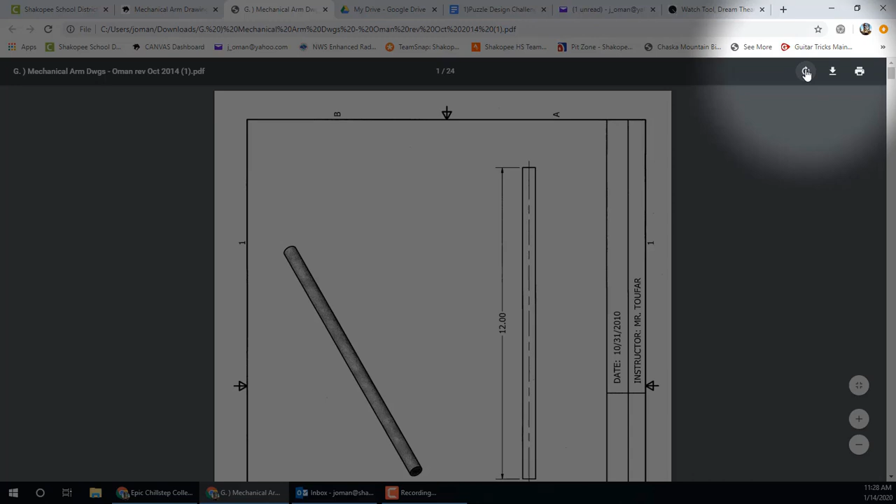This is Mr. Oman. We're going to be drawing the mechanical arm today using Inventor software. I need you to download and open the direction PDF file, rotate it until it's upright, and begin. There are 19 parts that we're going to draw.

The first 5 of them are all these wooden dowels, look like sticks. Okay, and you'll be drawing them as part files in Inventor, as I'm showing here. And you'll get pretty used to the routine here. We'll start a sketch, we'll draw a circle, finish the sketch, and extrude it.

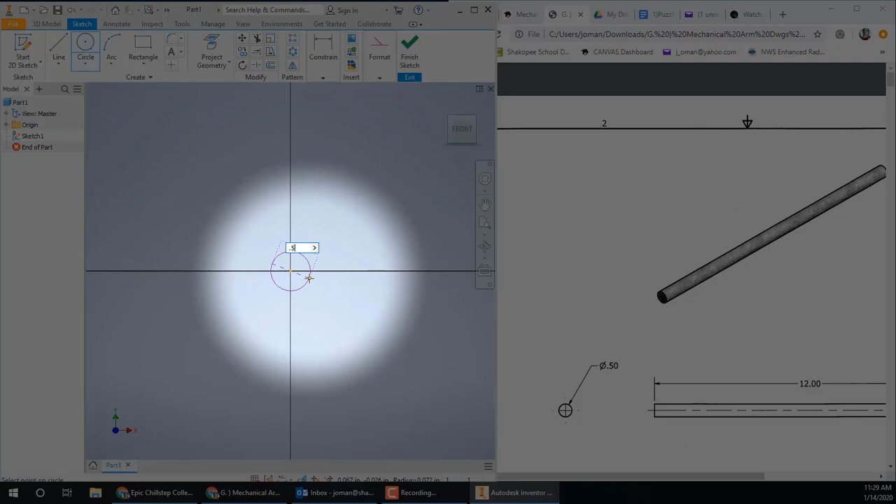So the first one, I'm going to use the vertical XY plane for my sketch. Draw a circle on it, 0.5 diameter. Finish the sketch and extrude it 12 inches. Okay, I am going to do this pretty fast, so feel free to pause the video here at any time. I'm going to keep things moving along here pretty quick as I go through this video.

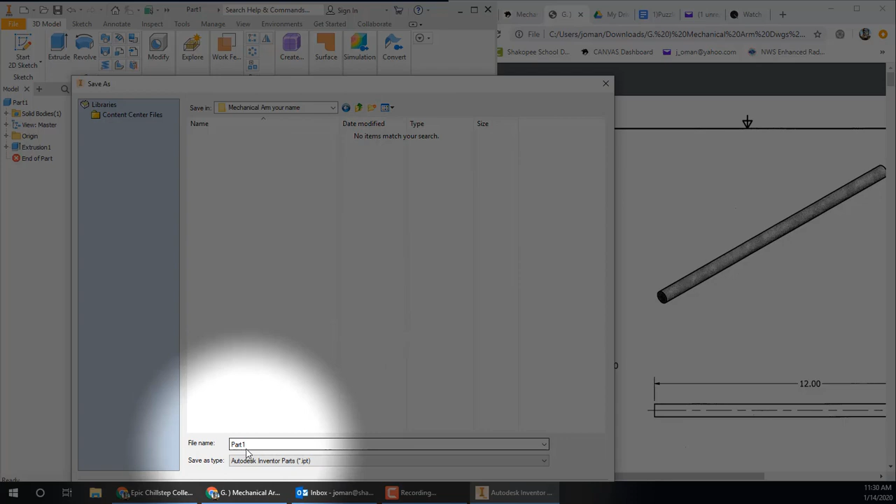Alright, so make sure you do a file save as, create a folder for yourself, most likely in Student Share or Student Home. I right-clicked, picked new folder, and I'm now typing a folder name, and I'm inside that folder. This is problem number 1 or part 1, so I'll just hit save, and it's going to be called part 1. Okay, start a new part and scroll down to part number 2.

Again, I'm going to go pretty quick here. These are very similar, same steps over and over. Start a new sketch. Draw a circle of 0.5, finish sketch, extrude, type your length in. Okay, so the first 5 here will look like this. Okay, if the name part 2 is listed, you should be able to just hit save, and it saves it in that folder.

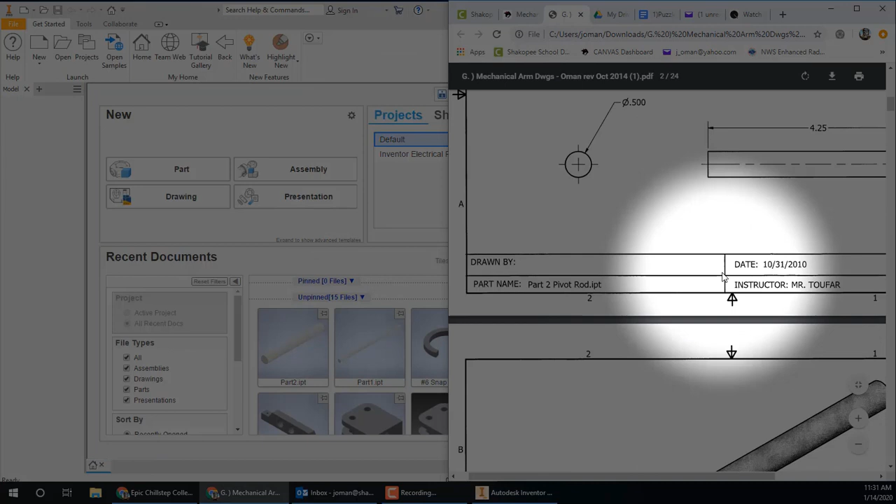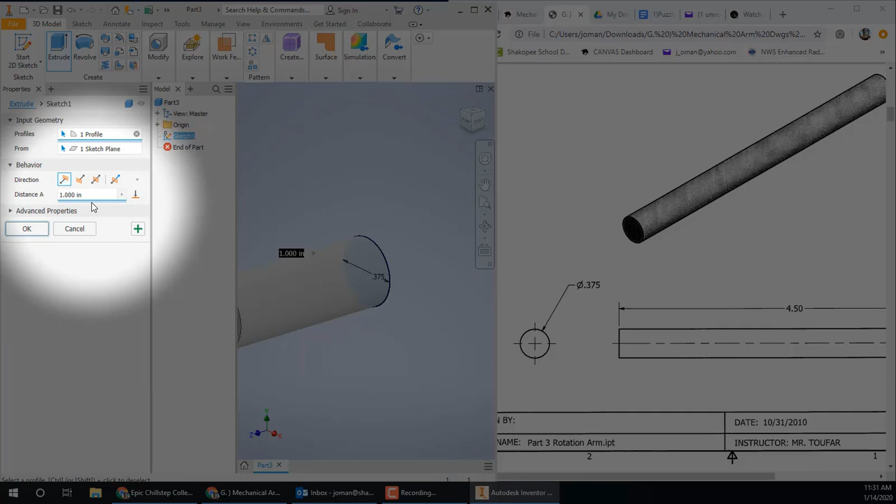This is part 3. 0.375 this time, and a 4.5-inch extrusion to finish it. Okay, on to part number 4, 0.375 diameter again. Looks like a 3-inch extrusion.

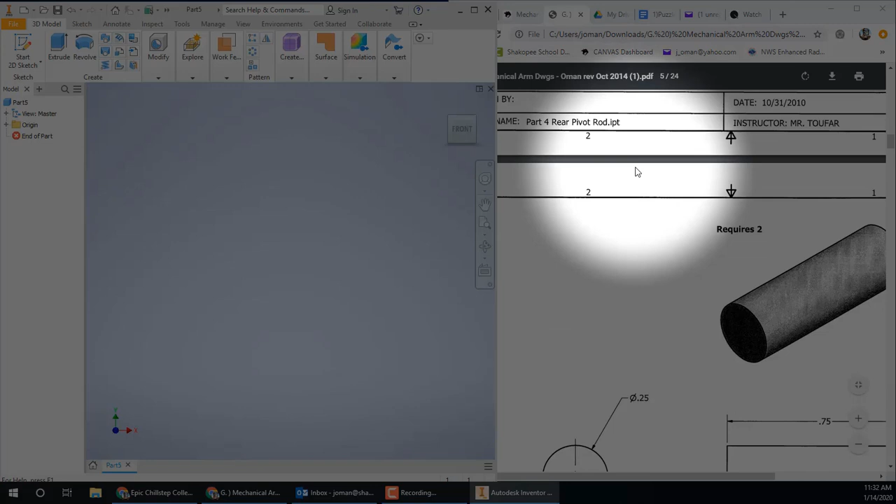Okay, it says requires 2 here on part number 5. We're only going to draw 1. Later on, when we get to putting all these parts together, you'll need 2 copies of this. But that's at the end of the project, so only draw 1 right now. So 0.25 diameter, 0.75 extrusion. Don't worry about the requires 2. Okay, so we've already got 5 parts created.

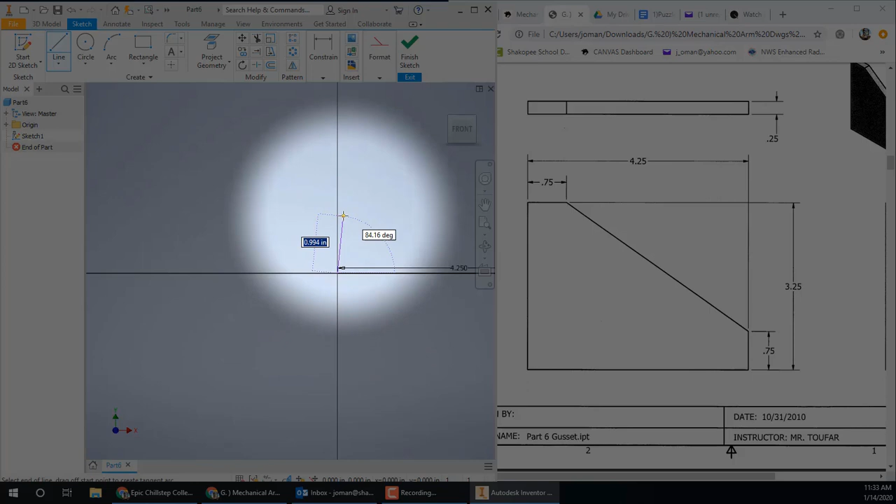On to number 6. Here's the first one where we're not drawing a cylinder. Okay, you start a sketch on the XY vertical plane. We'll just draw our way around the outsides. The angled edge there, we don't know what that angle is, so we'll just connect the endpoints of the lines around it. I'm drawing the bottom edge 4.25, now the left edge, which is 3.25 up.

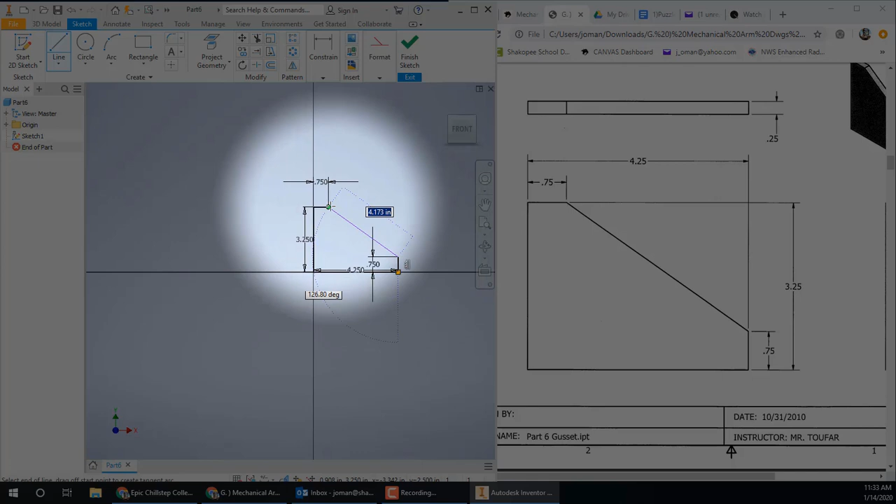Okay, I can't draw the angle just yet. I have to get in, finish all the other lines around it. Now I can connect the dots. Okay, and I'm going to extrude it 0.25, and save. Okay, on to part number 7.

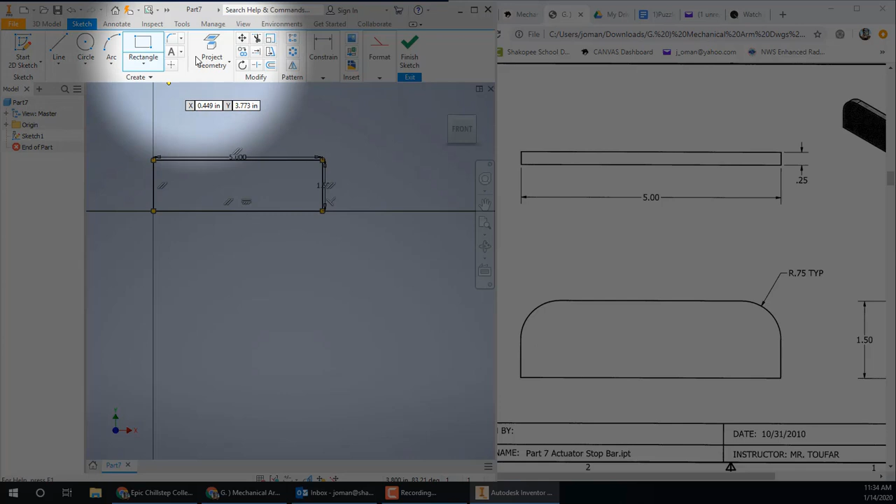I'm going to start by drawing a rectangle. And notice there's 2 measurements. The first one is the length of 5, then I press the tab button on the keyboard and I type 1.5 for the other one and enter. Okay, to round over the corners with a radius of 0.75, I pick the Fillet button and I have to type in that 0.75 setting.

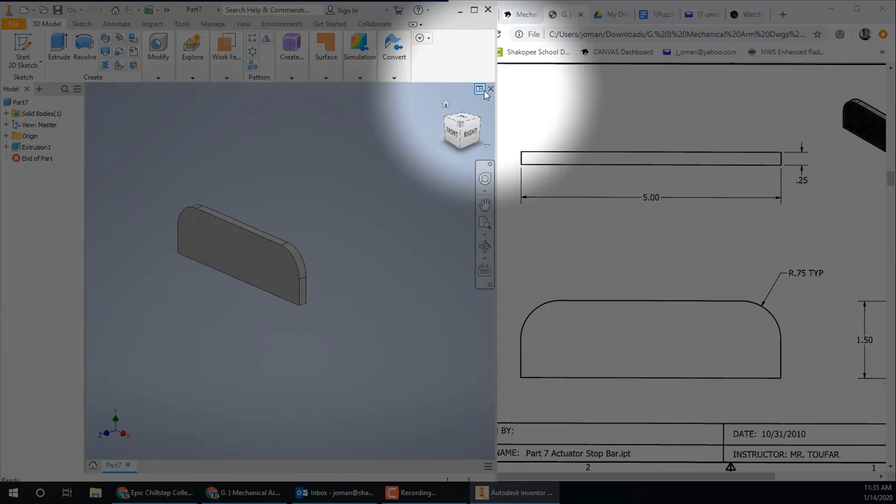Looks like I hit the enter key too early. I got to do it again. 0.75, click your corner, and the enter key to finish it off. Finish sketch, extrude 0.25. Okay, save it. File save as. Part 7. Now you can close it and move on down to part number 8.

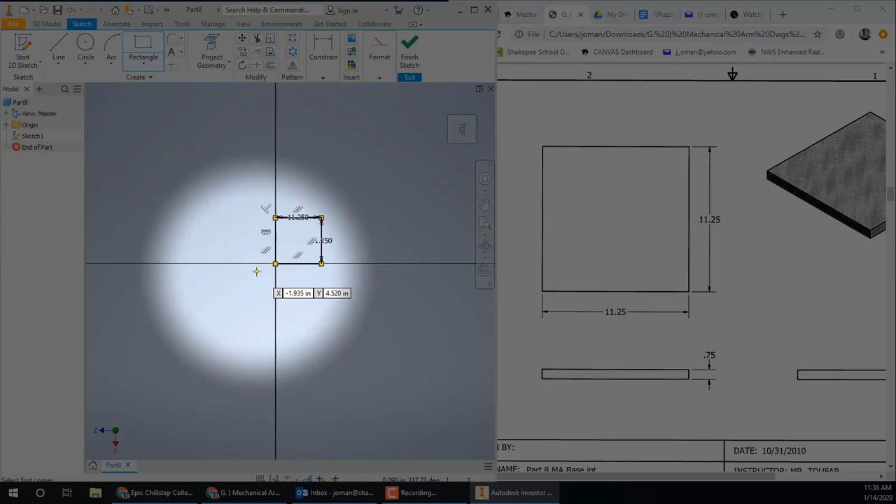I'll do the horizontal plane this time because this is the base or the platform that your mechanical arm sits on. So that's the way it'll be oriented in space when you get done. If you picked a different plane, it could still work. But this would be the best choice. So I drew a rectangle 11.25 by 11.25, extruded it 0.75, and I saved it. Okay, we're on to part number 9.

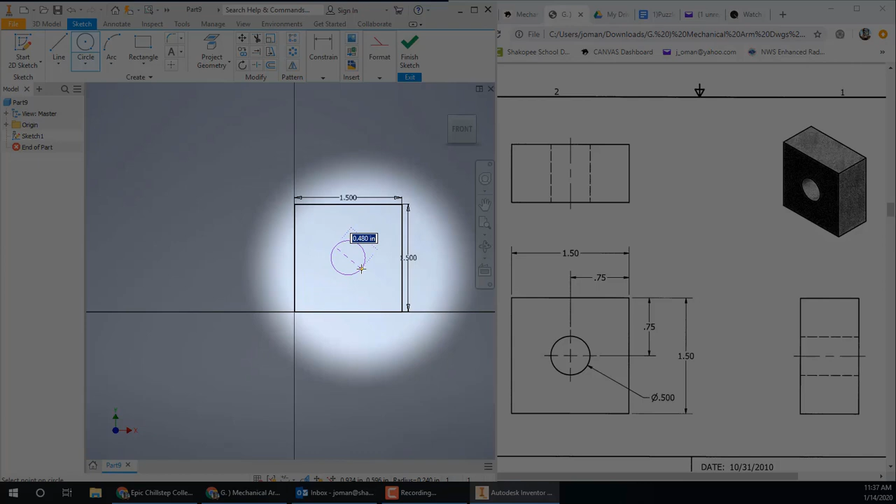Okay, there's a little bit of missing information. I made a mistake on the directions here. This thing is 0.75 thick. That's not showing, but it should be. So draw your rectangle. 1.5 square, tab 1.5, enter, draw your circle. So I'm finding kind of the midpoint and letting Inventor guide me out there with the dashed lines to draw my centered circle of 0.5 diameter. And you can extrude this again, that should say 0.75 thick. And OK.

Okay, that one is saved now. On to number 10. Okay, it's 0.75 thick. It's a rectangle. We're going to round the corners with a fillet. Use the horizontal plane to draw a rectangle. I'm drawing 5.5, tab 3.5.

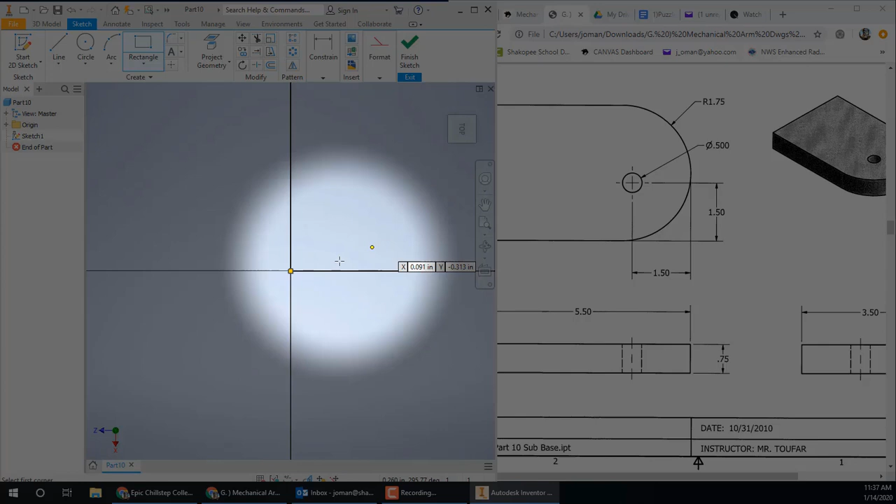Right there, mine's turned from the way it shows in the space on the directions, but that's okay. Radius 1.75 on my fillet. Round those over. Hit enter.

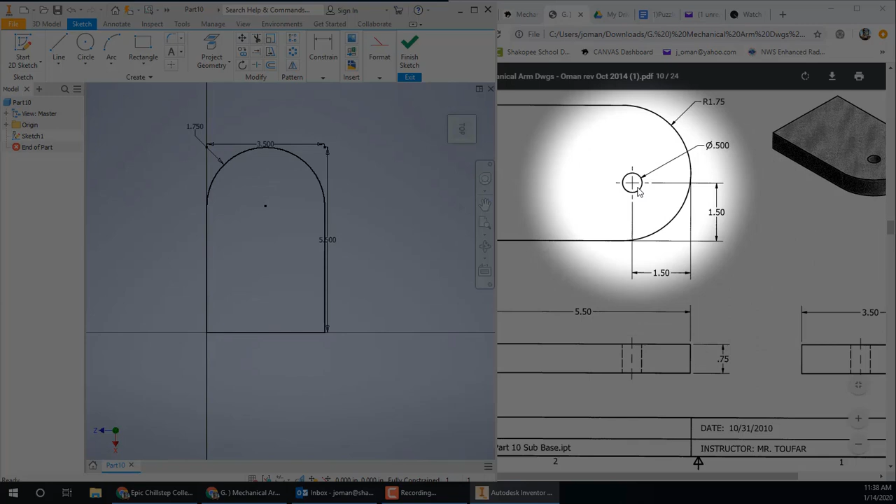Okay, this circle, this is not centered, and that's okay. So it will be 1.5 by 1.5 from the corner. So we'll dimension that here in a moment. That circle looks like it's 0.5 diameter. So measure from an edge to the center point and correct that to say 1.5 with your dimension tool.

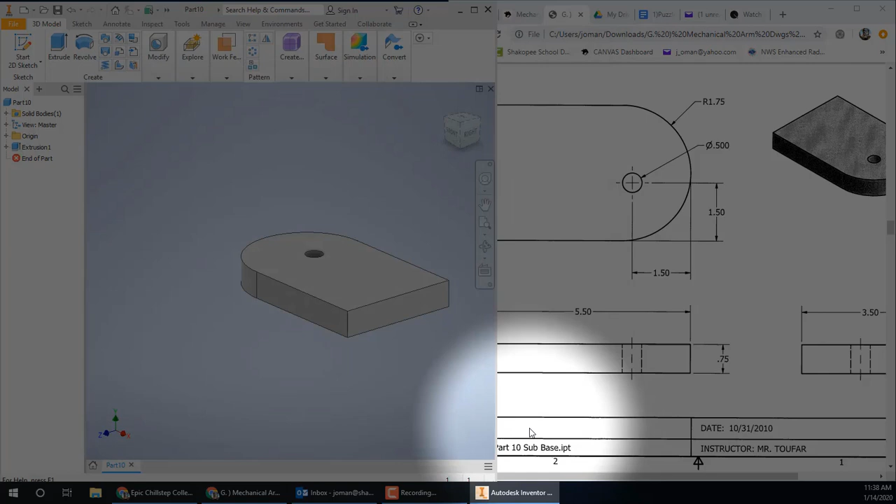Okay, now it's in the correct spot, a little bit off center. Extrude 0.75. Okay, that was part 10, the sub base. Okay, we're onto the finger actuator clamp, part number 11.

Alright, we're going to draw a rectangle 3 by 1.5. 3 tab 1.5. Enter. Round over your corners. Fillet 0.75. Okay, you can put your circles using those center points of the arcs.

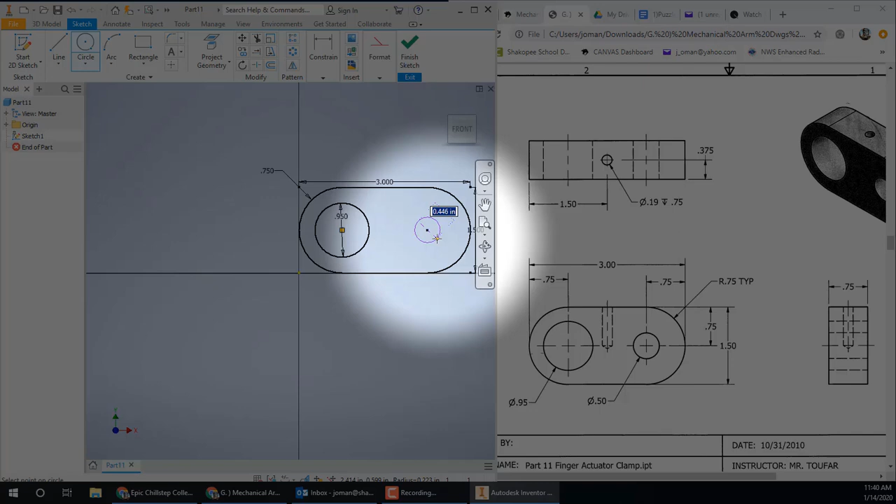We got a 0.95. This is where one of the syringes will go. So these larger 0.95 holes are meant for that. Type 0.95, enter. And the smaller one, one of your 0.5 diameter wood dowels will go through that other smaller hole when you build it.

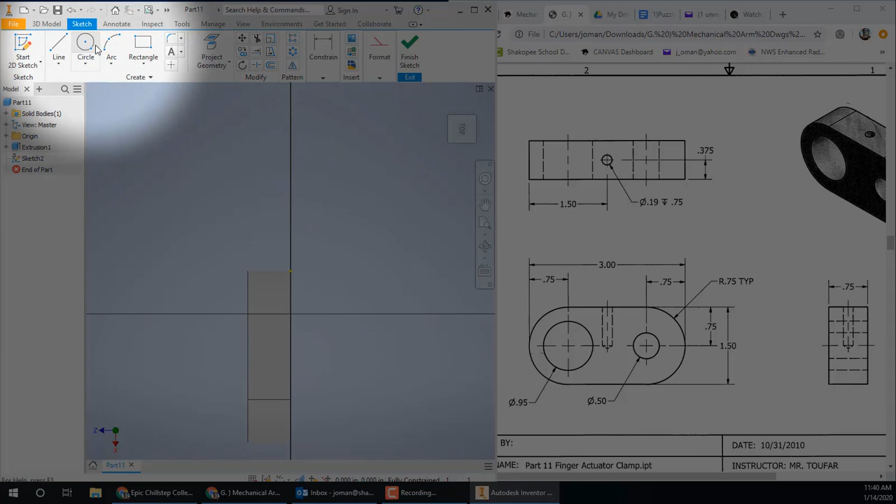And you can extrude 0.75. There it is, and 11 is done. Oh, I'm sorry, we still have the hole on top here to do yet. Okay, that will be centered.

It's 0.19 diameter, I'm sorry, and it's 0.75 deep. So 0.19 diameter and an extrusion depth of 0.75. Okay, I'm centering it. It's 0.375 in from the edge. And I will cut that in to a depth of 0.75.

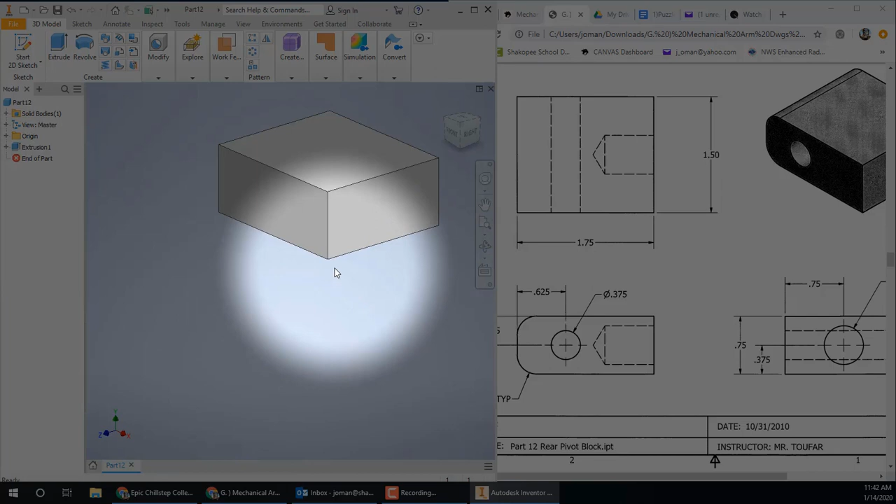Okay, we're on to part number 12. So we'll start a sketch here on the end. This is for the hole that goes all the way through. It's diameter 0.375 and I'm dimensioning it 0.625 from the end. It should be centered vertically.

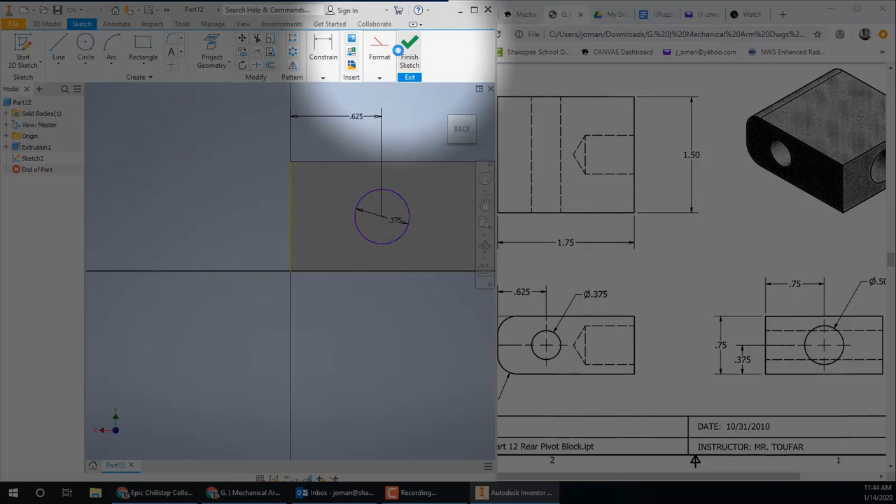Okay, and that is on that long face. Have it extrude and cut all the way through. Okay, next up we'll round over the corners using the 3D fillet option. You do have to type in your radius, which I can't see until I do that. So 0.25 is my round over radius.

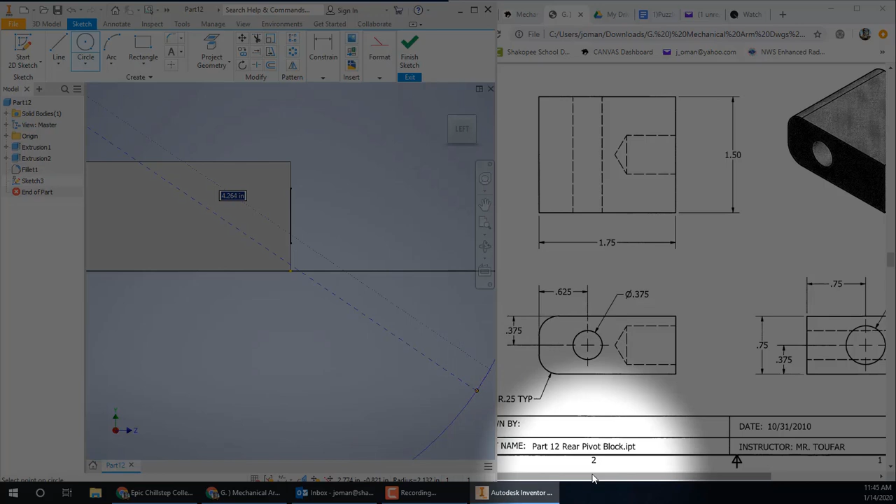Pick your edge and you should be able to hit OK. Right there. Okay, on the other end we have one more hole to cut in. Let's get it right on that center line. 0.5 diameter, 0.625 deep.

Alright, I'm using the point tool here, putting a point in place. If you'd rather draw a circle and extrude it, that's fine. And type in your measurements into the hole command over here. You can see I'm getting my settings all fixed up here.

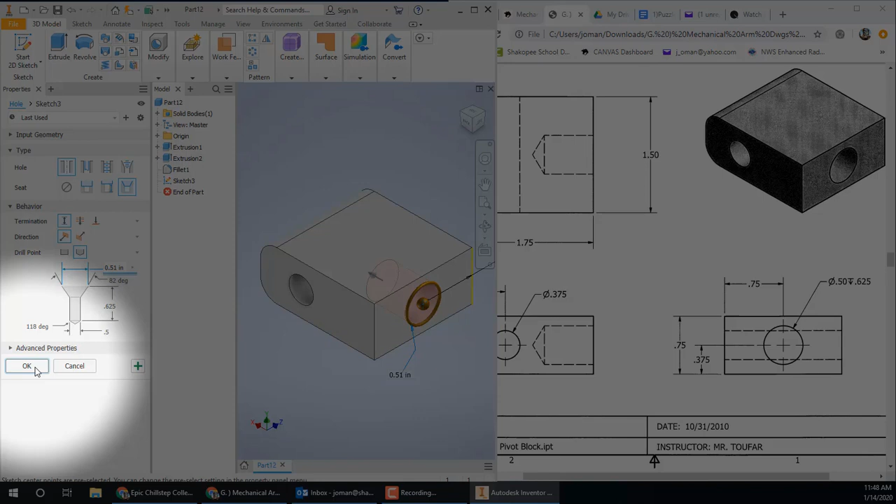Feel free to pause and match your settings with mine. And hit OK. And this part is all done. Alright, on to our next part.

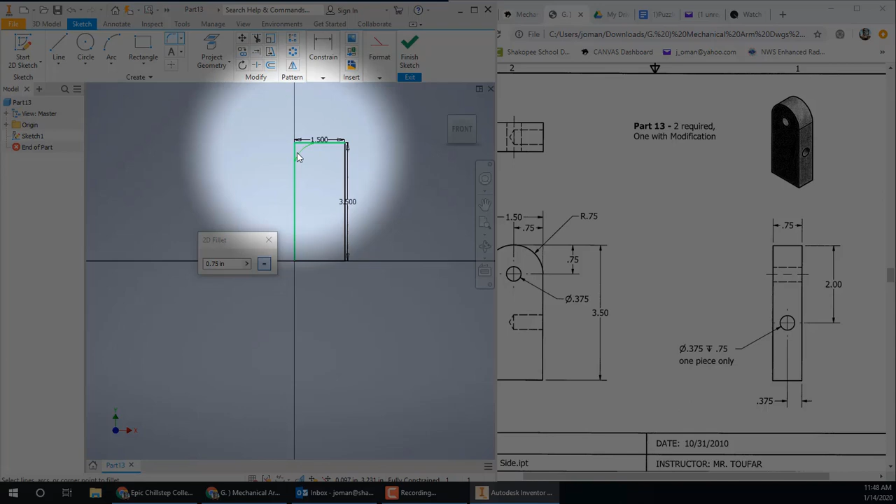So our rectangle is 3.5 by 1.5, and I'm rounding it over with a 0.75 radius fillet, and I'm putting a 0.375 diameter hole on the center. Finish sketch, extrude 0.75.

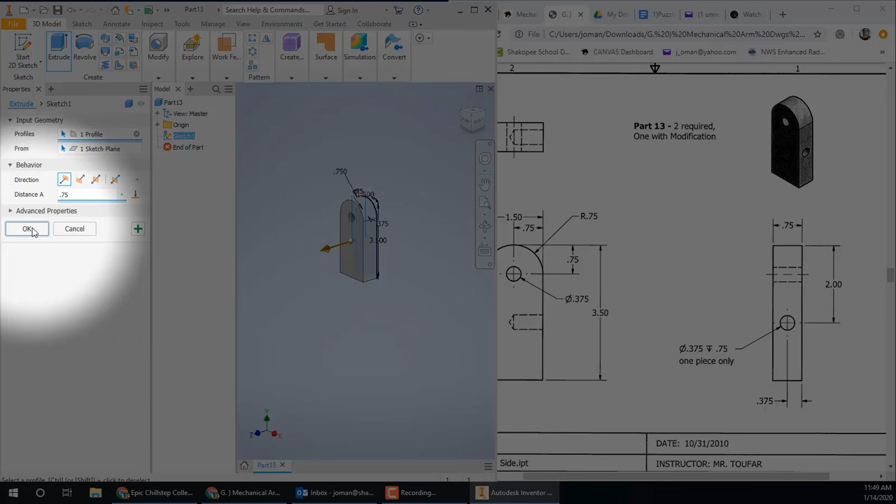Okay, on the side we have one hole to do. We got to get it centered, and that hole is 0.375 diameter, and it's, I have to do a little bit of math here to figure this one out. It's 1.5 from the bottom,

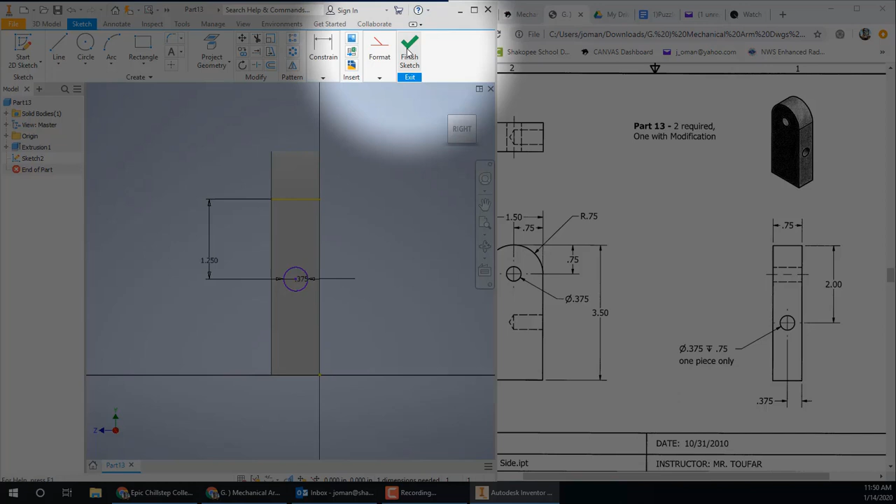or you could dimension it from the top, which tells you 2 inches, but right now it's not letting me select that very top edge because it's curved. So a long way to get there. Dimension from the start of the curve right there, and you should have 1.25. So there's a couple of different ways to dimension that and get the same result.

And you can cut that. That goes halfway into your block, which is 0.75 deep. Alright, this block is done. Alright, we are on to number 14.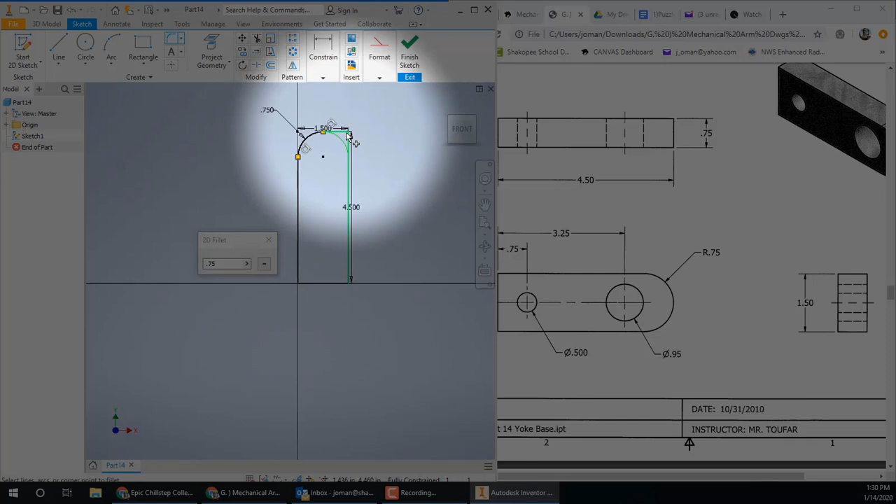Alright, so there's some measurements for you. So 4.5 by 1.5 is our rectangle, rounded over with 0.75 fillets, and the 2 circles are centered and dimensioned 0.75 from the end.

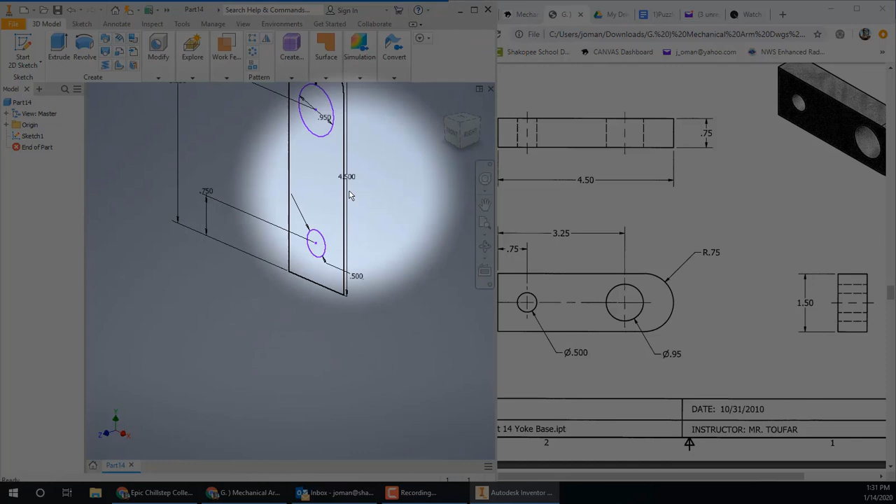And this one is a little larger, 0.95 diameter, and from the bottom end 3.25. Finish sketch and extrude 0.75. And there it is, all done. That was part 14, the yoke base.

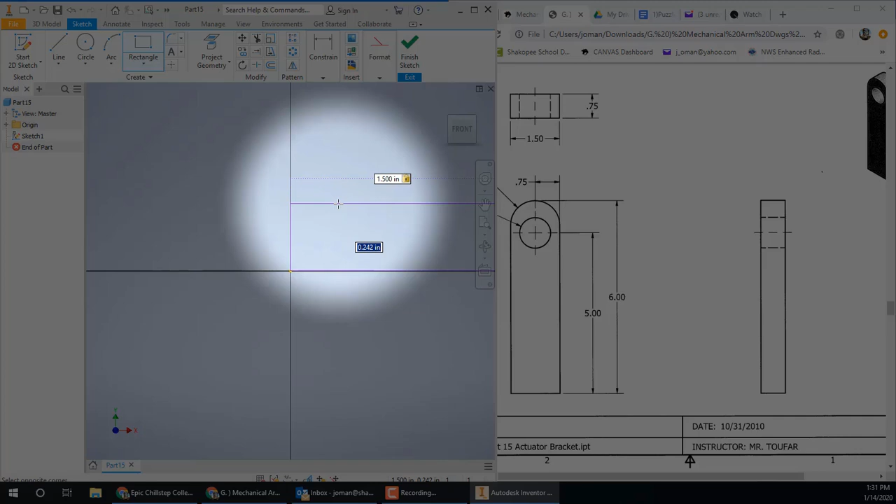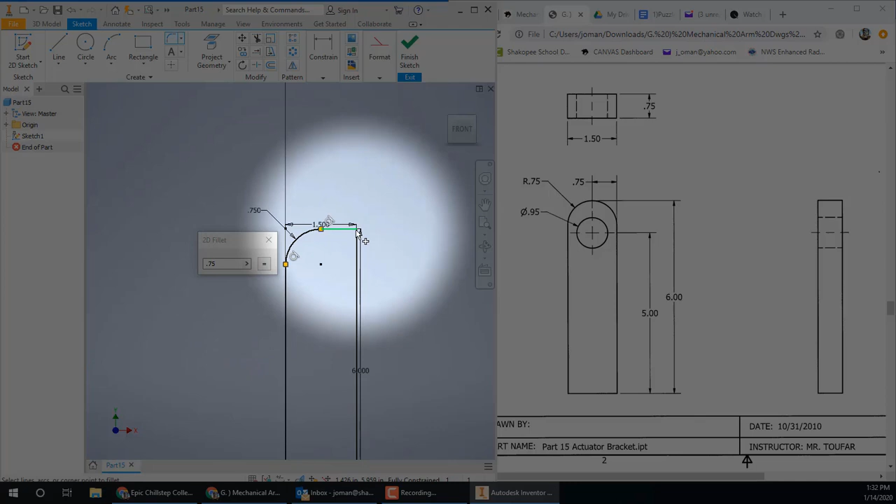Part number 15. Okay, our rectangle here is 6 by 1.5. Round over is 0.75. Okay, 0.95 diameter, and dimension from the bottom 5 inches.

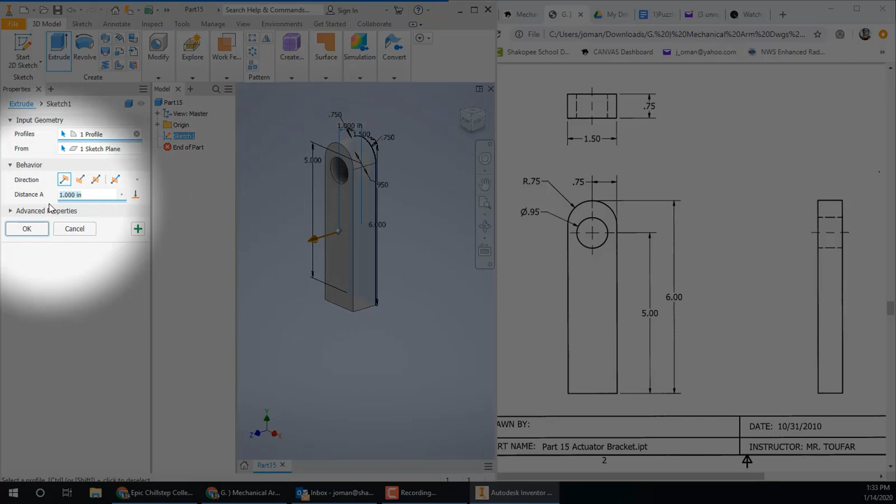0.75 extrusion. And you can save this one. It's part 15. And we're on to part 16 now. Okay, this one can be a little bit more tricky for people. Alright, I'm going to draw the outside edge starting on the left end of the block.

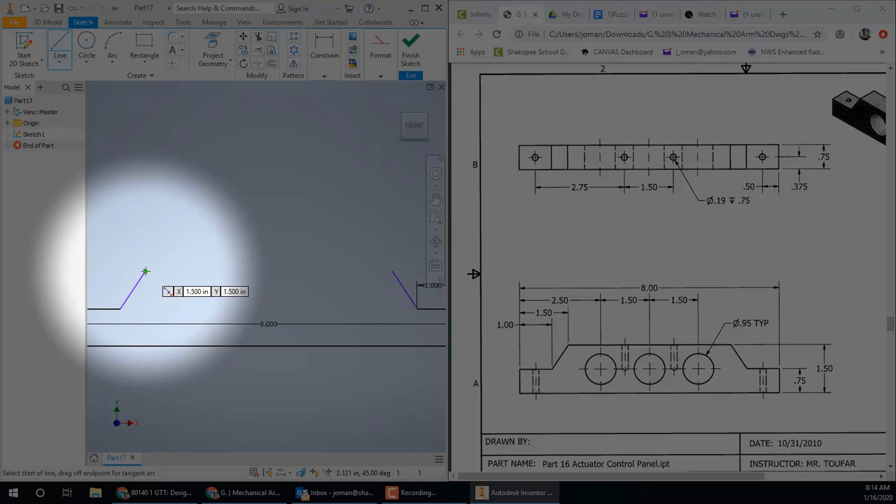Okay, work my way around the outside edge. For this angled line, I go up and over. I draw kind of a triangle with the dimensions that are given. So 1 inch up, ½ inch over. I'm sorry, 0.75 up, ½ inch over. Then I connect the ends and delete the original lines there. Feel free to re-watch this if you need to see how I did that again.

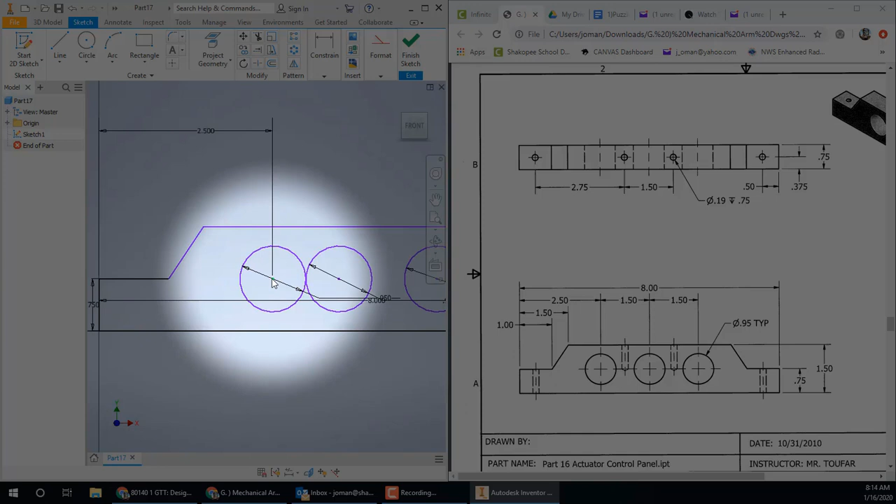I'll add the circles, they line up. 0.95 diameter. 3 of them. I'll dimension these later to make them correct. Okay, 0.75 extrusion.

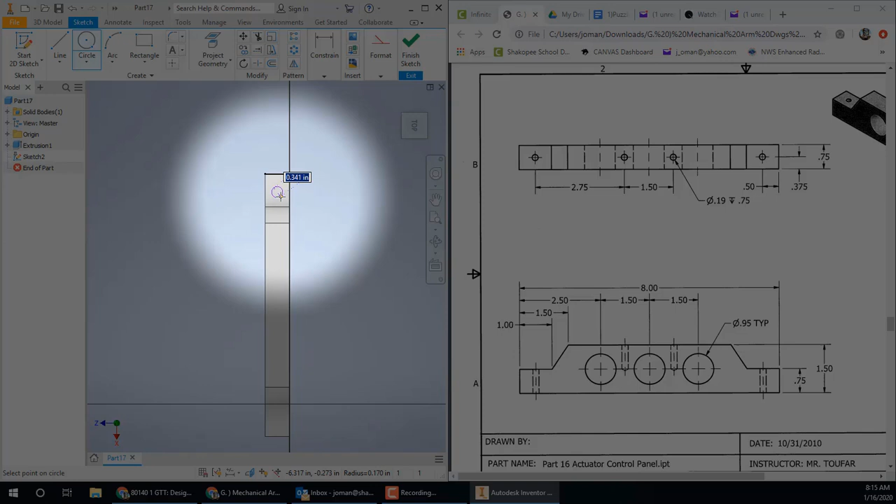And we'll start a sketch on the little flat ends down here. And we'll draw the last holes in and get those dimensioned correctly. Those holes are all 0.19 diameter and they go all the way through. We're only going to do the 2 that are closest to the ends. We're going to skip the 2 that are in the middle that are showing in the top view. When we actually make this in the shop, those 2 middle holes won't get used, so we won't bother drawing them here.

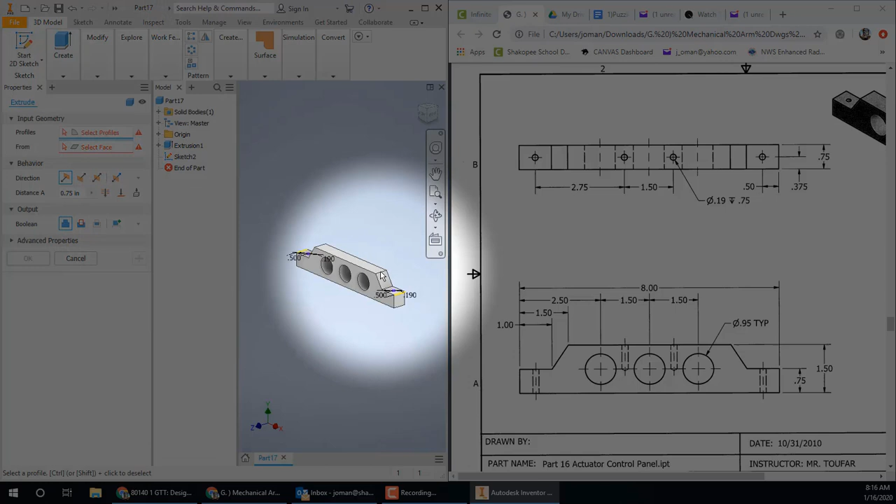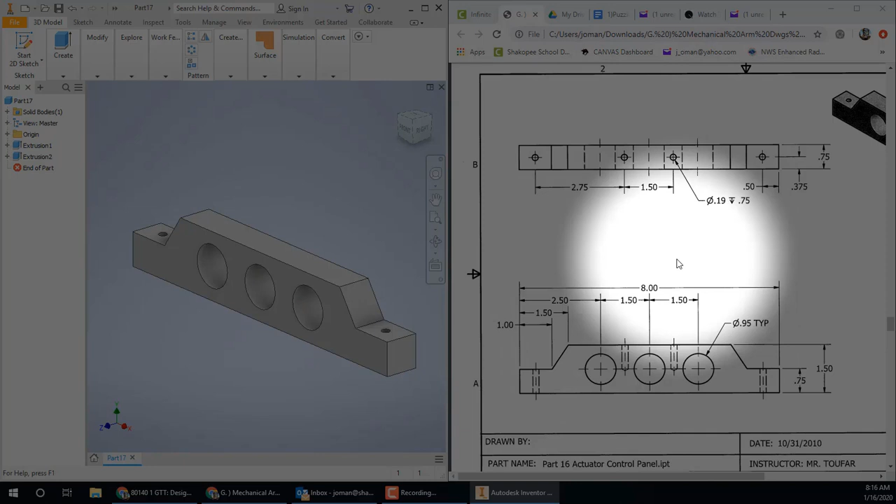Okay, and we can extrude and cut these all the way through. Okay, we'll skip those remaining holes. They're not needed. Save your work and move on to part 16. Excuse me, that was part 16. We're going on to 17 now.

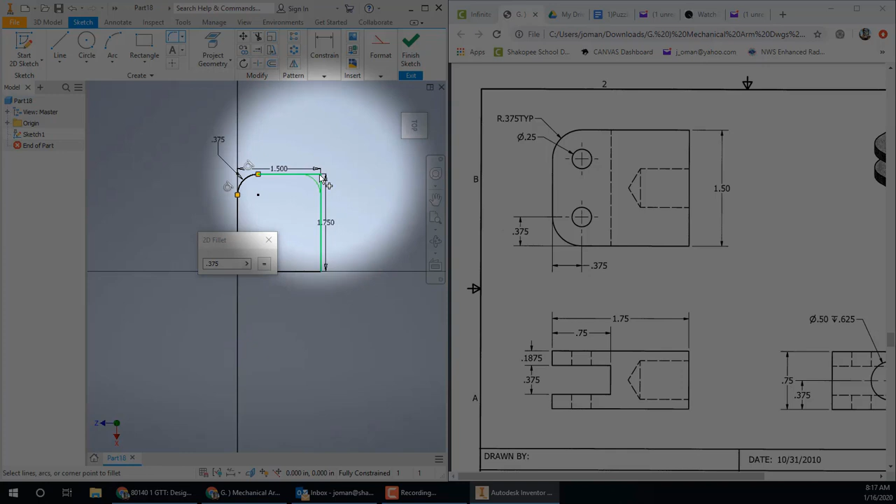Okay, we're going to draw another rectangle of 1.75 by 1.5. So 1.75 tab, 1.5 enter is what I'm typing here. Okay, mine is sitting in a different direction than the views on the directions, but that's okay. Okay, we'll round the corners first. Okay, 0.375 round over.

Okay, we got the two holes going, and dimension, we're extruding 0.75 here. Okay, one more sketch. Two more sketches actually. Okay, we'll do the hole in the end first. Okay, this will be centered. So we'll be using a point. We'll place a point right in the center. We'll use the hole tool. So it's centered, which means it is 0.75 from the right end.

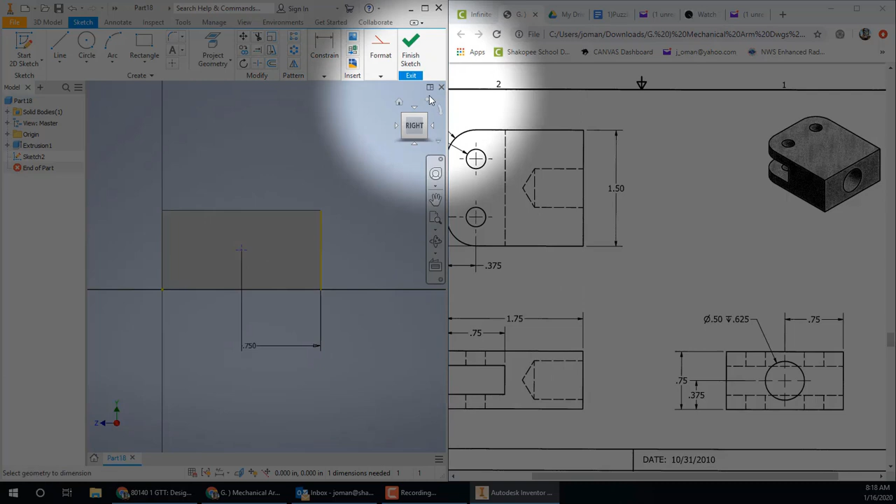Finish sketch, find the hole tool. Okay, type in your settings. 0.5 diameter, 0.625 deep. Okay, this should be a nice straight simple hole.

Okay, now I'm going to have a sketch on the side, and we're going to cut away a rectangle. This will pass right through those holes that we've already done. Make sure you dimension this correctly. 0.1875 on the sides. 0.375 wide is how wide the rectangle is. Extrude, cut that through, and this part is all done.

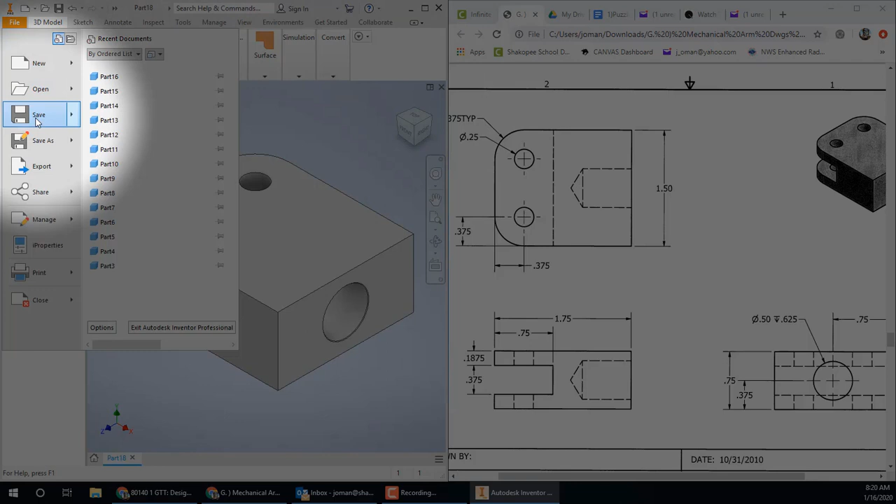Okay, we're into the parts 18 and 19. They're all the same part. Eventually this gets cut apart into two separate fingers. We'll treat it as one part. We'll call it part 18 and 19. Okay, I'm using the horizontal flat surface. I'm going to draw my way around the outside edge, starting here. And I'll leave the most complicated area till the very end. So right now I'm just following the dimensions given around the outside.

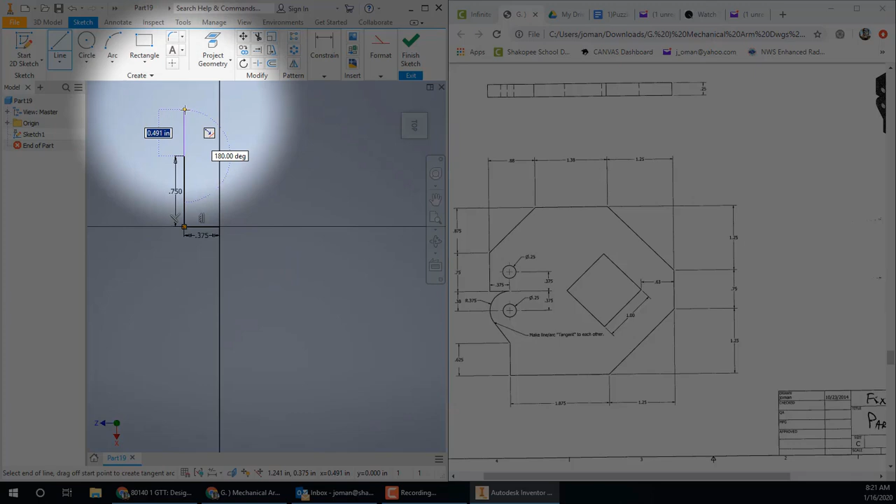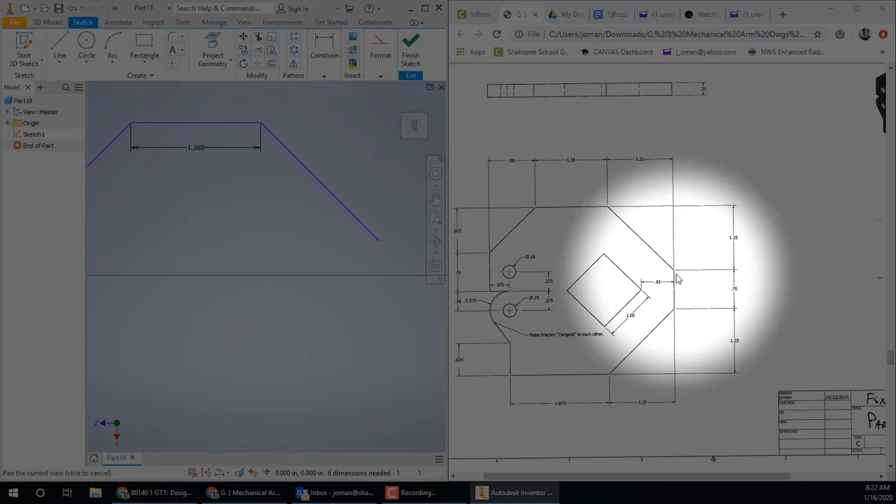The angled corners, I draw up and over, I create the triangle, and I come back with the diagonal right here. This allows me to hit escape and click on each of those lines and select them and delete them. Okay, here comes another corner triangle. Another corner. Angle it back, delete.

And straight up. Okay, once you get this line done, you have to stop drawing the outside edge and take care of the circles. Okay, all these measurements coming up are 0.375. The spaces themselves are 0.375. So I'm drawing a little temporary line, both up and down. These will get deleted in a moment. This just gets me to where I want my circle to be. 0.25 diameter.

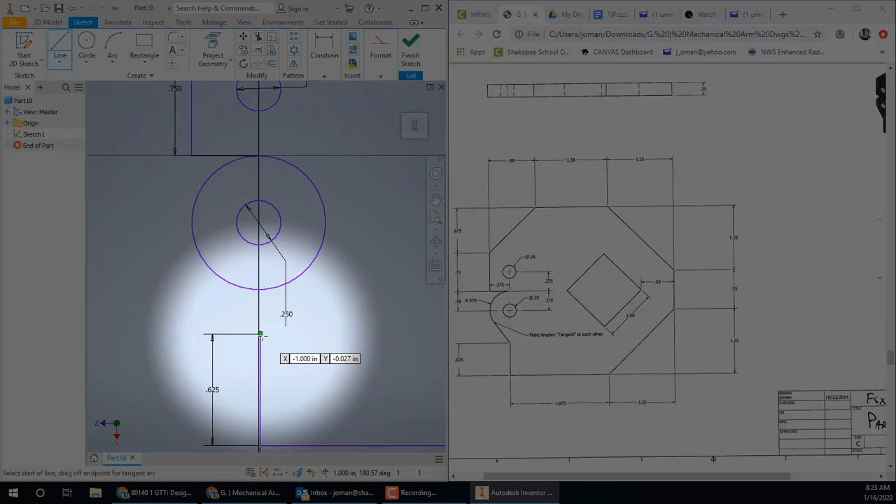Okay, now I'm going to delete those lines. And I'm going to draw a larger circle, which will eventually become the arc right here. So I'm going to draw this, and later I'll trim it. Just bring it right back to that end point. Has the same center as the smaller circle.

And now with my line tool, I'm going to connect this end point. I'm looking for the tangent symbol, which is a circle with a line next to it. You'll see it pops up in the video right there. Click as soon as you see that. That's Inventor helping you to find the tangent point, which gives you a nice smooth connection between a circle and a line.

Okay, the final thing to do here is to get your inside cut out to your diamond. So I'm going to draw my line in to get me started. And then I'm going to angle. So I type in my 1-inch measurement, tab 45. So we get both the distance and the direction specified. So continue on, follow me through here.

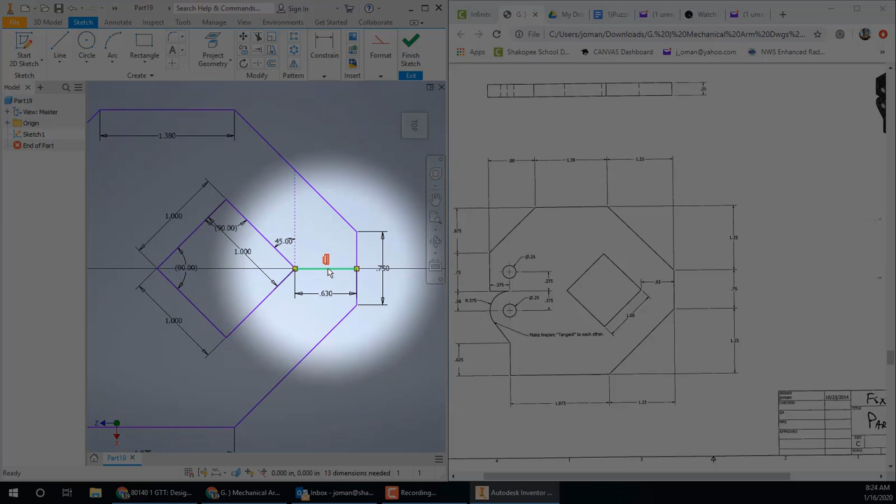These are all 1-inch lines. And I'm getting my angles set. Should be a perfect diamond when you get done. And you can delete the original line. Okay, at this point, if your artwork is good, you should be able to extrude at 0.25.

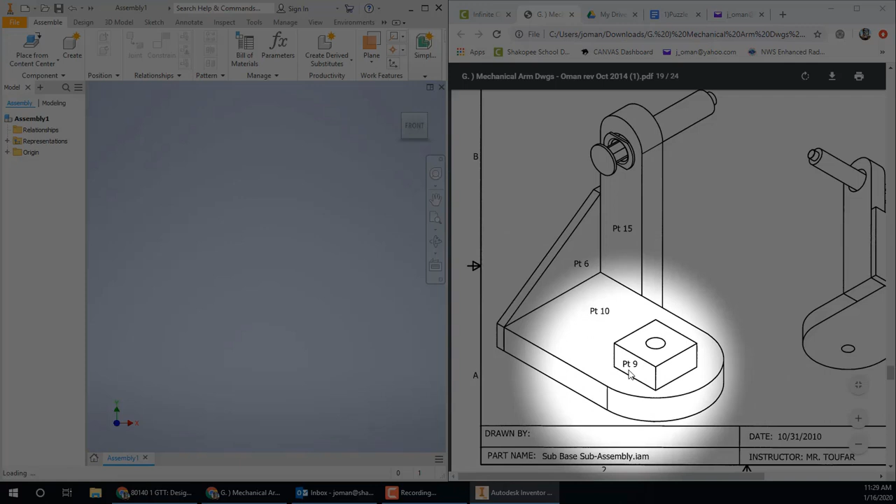Alright, you can save this as parts 18 and 19. And then we'll be ready to start our assembly files coming up. Okay, so this time we're selecting the assembly button, not part. We're putting together all of the parts that you've made so far using the place tool.

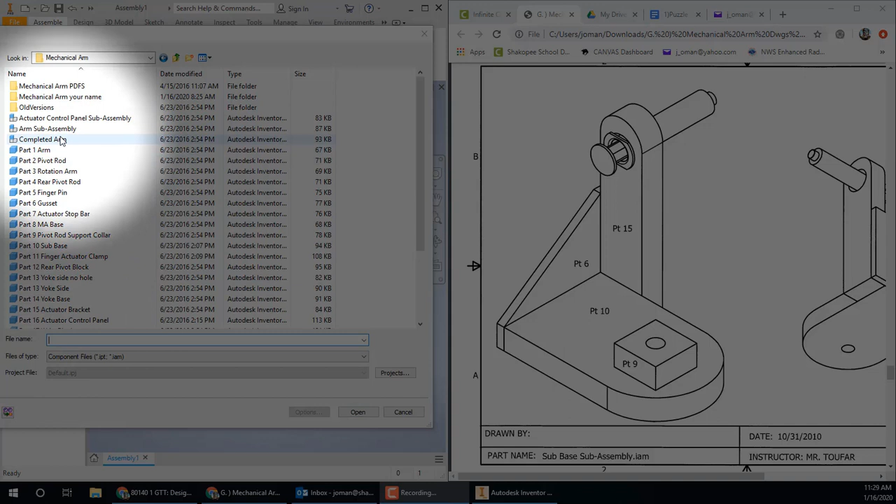Okay, so you have to go back to your folder where you had been saving everything. I have to find the correct folder where I've saved my stuff. That's what I'm doing here. You find your folder wherever that is. Alright, and looking at the directions, I'm just going to start placing the part numbers that are labeled in here.

So parts 6, 10, 15, and 9 it looks like are the ones we need. We're not going to do the syringes. You can ignore that part. Okay, once you've got all the parts placed, you can right click and hit OK, and they'll be ready to constrain and join these together.

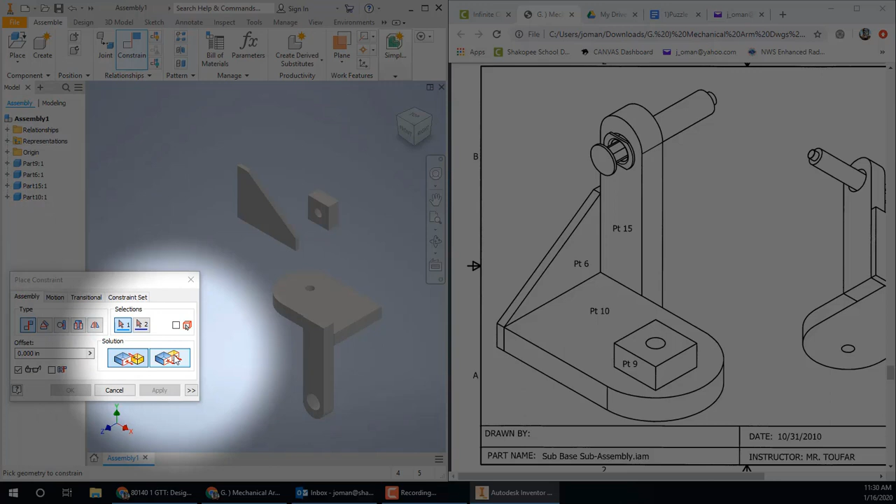Alright, so now we've got our parts placed and we are starting the sub-base assembly. You turn on the constrain tool and we're going to be doing several mates and flushes. So we mate the two faces together. It's like putting glue on a board and gluing it together. And you switch to flush and you get the sides evened up. And you've got to do two flushes, the bottom edges and the side edge.

Okay, I'm switching back to mate. I'm going to mate this angled piece there. So now they're stuck together, but they're not flush yet. Switch to flush, flush those two edges, hit apply, and the two bottom edges as well. Okay, so that's what I have so far.

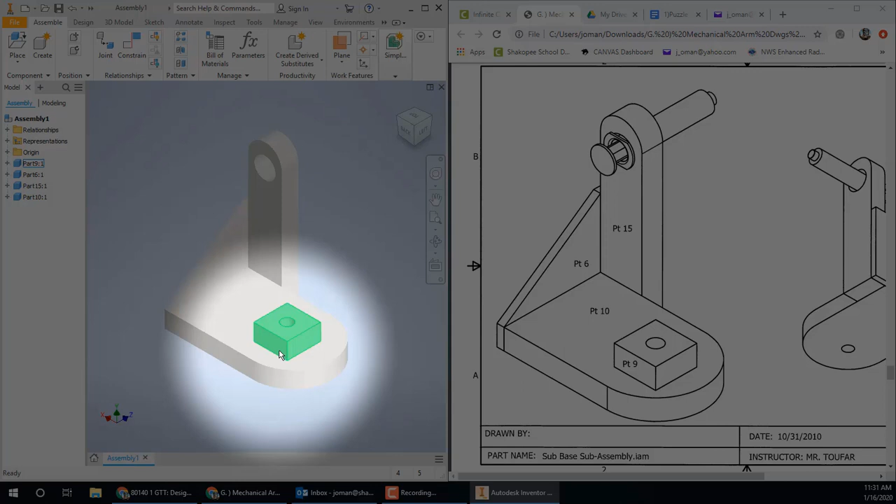And the final constraints, I'm going to use the insert option. I'm going to insert that hole to that hole, hit apply. You can still spin that object, but you want it to sit still. So back to constrain. Using the angle constraint and the center solution, I'm going to pick those two edges and make them 0, which basically makes them parallel to each other. So that was an angle constraint for the last one.

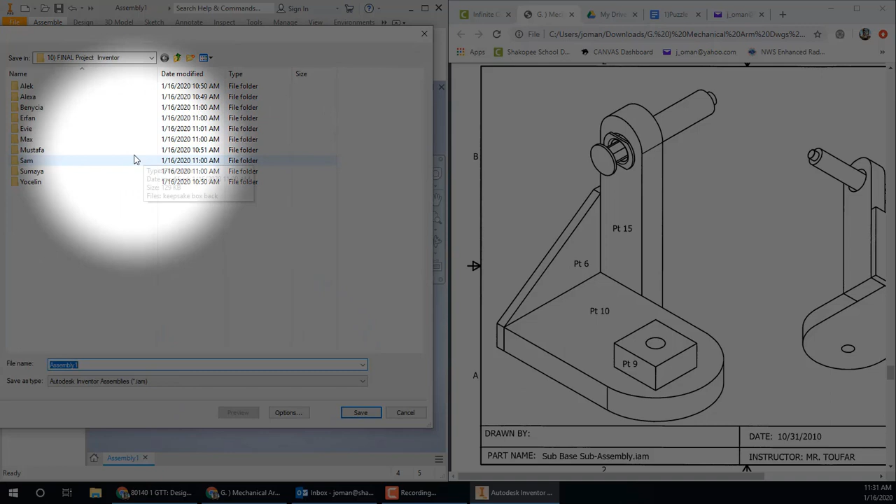I'm going to save this in my folder. You can save it in your own folder. Okay, I'm going to close it. I'll move on to the next assembly.

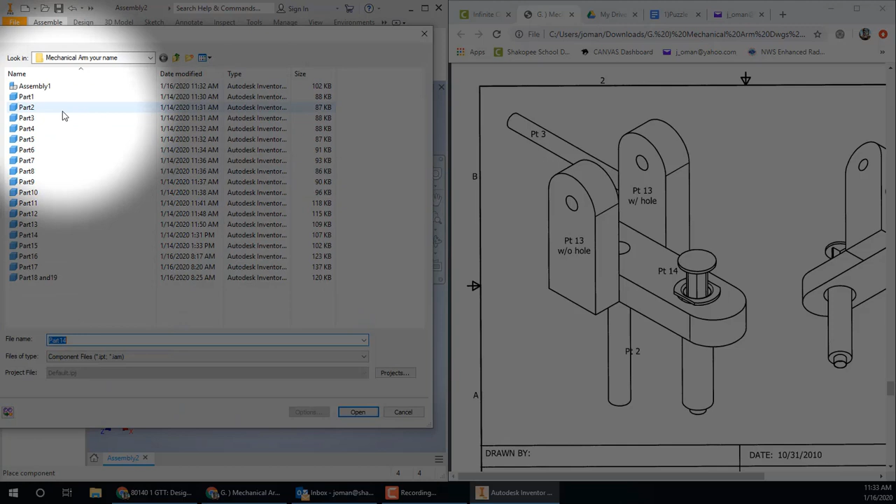So press constrain. I'm going to mate the long edge to the inside. Now, I know that looks strange. It looks wrong. It's actually okay. I still have to flush the end to the side. Probably placed my 2 part 13s too close together. That's why it looks strange. But after you mate and flush it, things correct themselves.

Now I'm going to mate this one over and flush the ends, flush the bottom. Okay, so those are now in place. You then place the dowel using the insert constraint. Insert the end of it right there to the opening. Mine's backwards, so I'm going to flip to the other solution.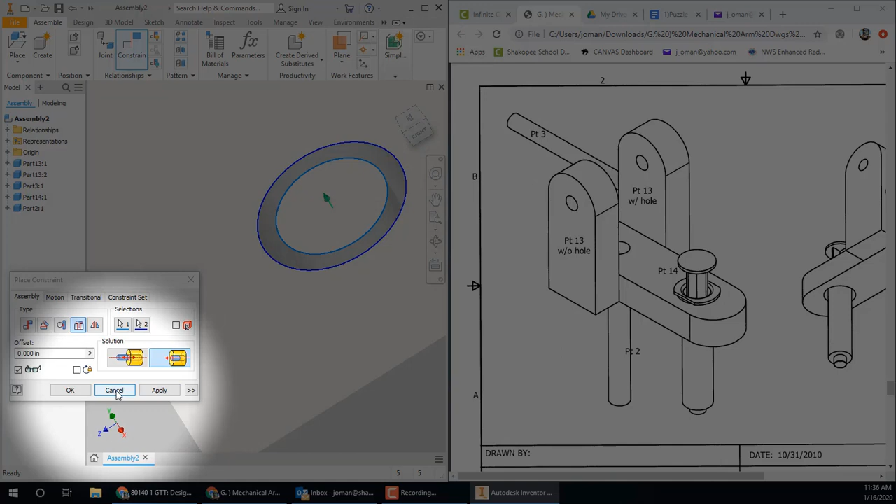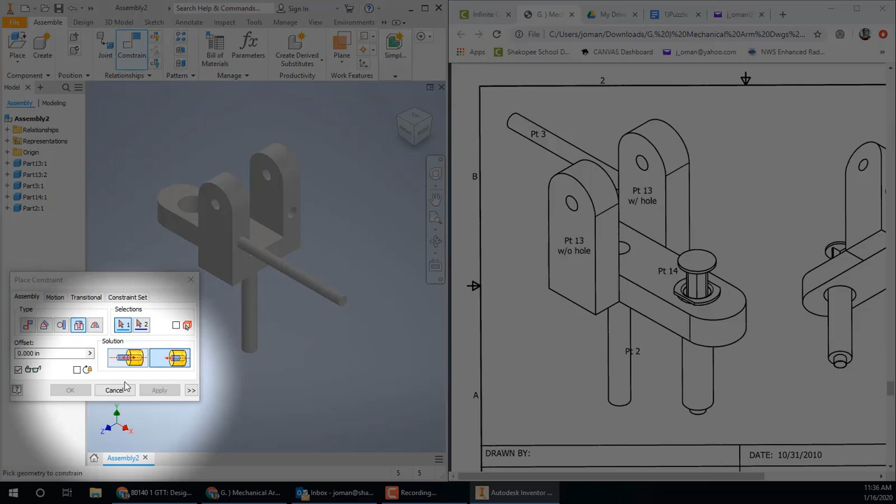If you zoom in, you'll see I picked the wrong dowel. So if that happens to you, just hit cancel. Try it again with the other one. Insert. And it is intended to go with that opening. And apply. And the bigger dowel goes into the bigger opening. There it is. Okay, go ahead and save that.

Okay, another sub-assembly here. Now we're getting out onto the actual arm. So we're going to need parts 12, part 1, part 11.

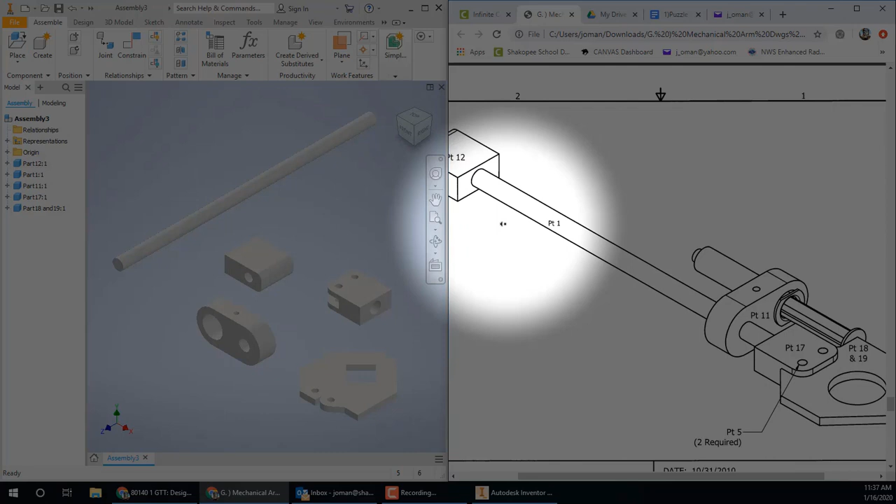Part 17 and 18 and 19. Okay, start constraining these parts together again. We'll be using the insert constraint more so on this assembly than other ones because we have round objects fitting into holes. Okay, just follow along and make sure you insert things all the way to the bottom of these openings.

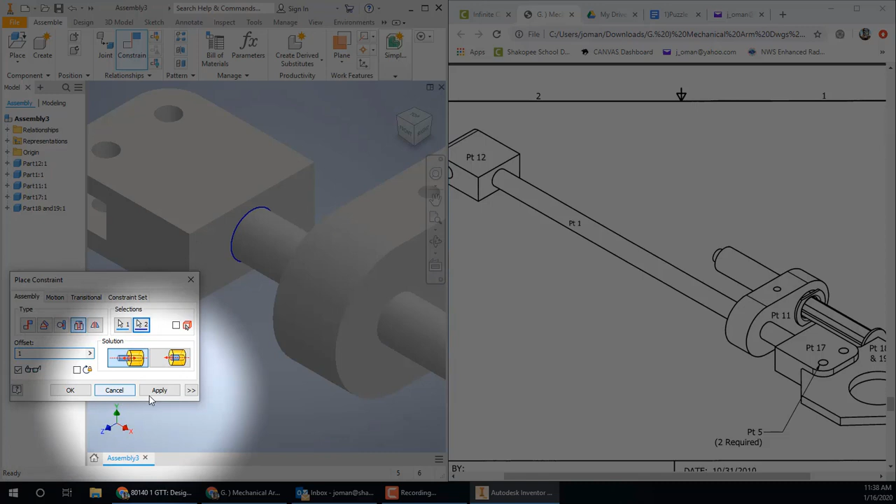And I pick the inside, the end of the hole to put on here. Otherwise it doesn't truly fit. This one gets placed here, which looks wrong, but then you can offset it. That should say 1 inch right there. So put a 1. Okay, if yours goes the wrong direction, put a negative sign in front of 1. It'll make it go the other direction, but mine was a positive one. Okay.

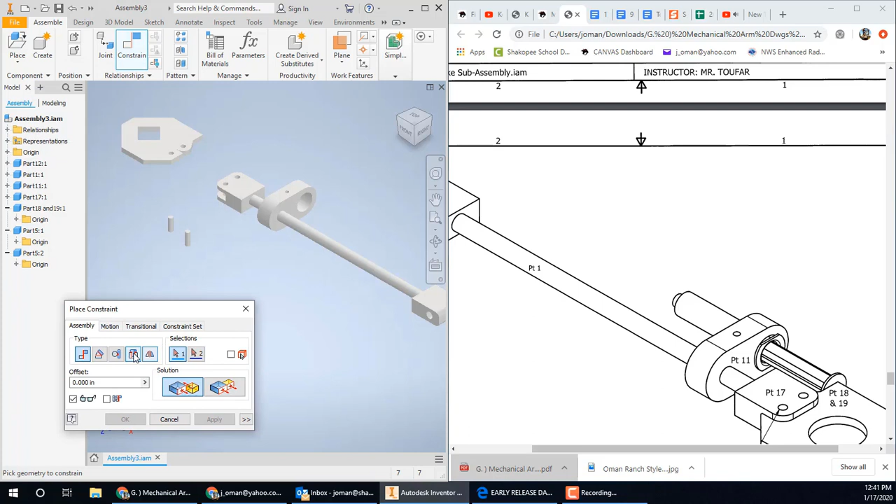Still need 2 pegs, so it looks like I need to go back and get them. So I got the pegs now, and I'm ready to do an insert constraint. Insert both of those into the holes. And we'll do an insert constraint to get part 18 and 19, the fingers, onto the pegs.

Do a little bit of repositioning your view so you can get at some of the locations that you need to click on. Think about which 2 pieces are going to be coming together and exactly where you should click in order to get that to happen. It takes just a little bit of planning and thought for this to go right.

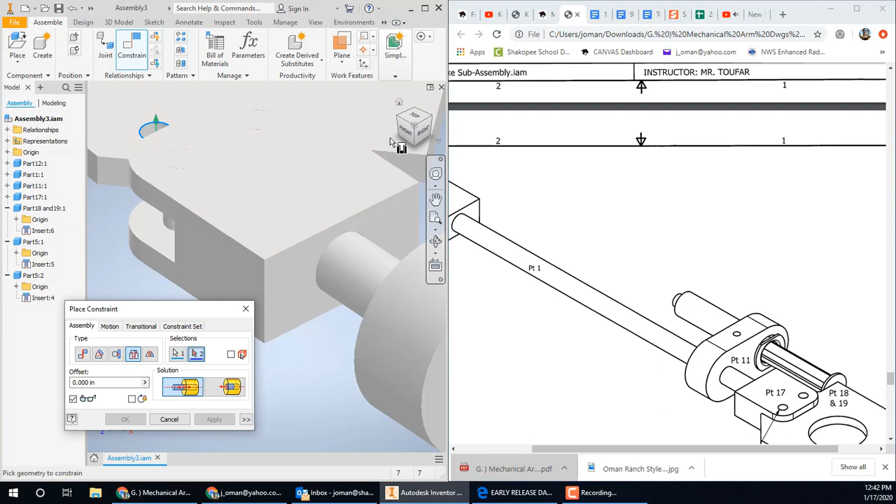So I insert the first hole onto the peg. The second one needs the same thing done, another insert. Rotate it so you can see underneath there, and it should be okay. Okay, go ahead and save that.

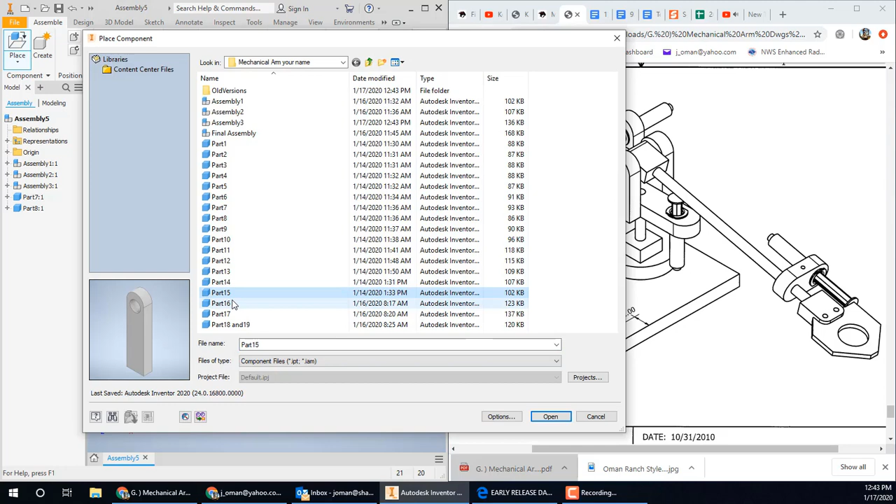Okay, you do not need to do the controller pad with the syringes in it. We'll just go right to the final assembly. We'll place all 3 assemblies in. You also need part 8, like the base. Part 16, the control pad. And the stopper out there as well. I believe that's part 7.

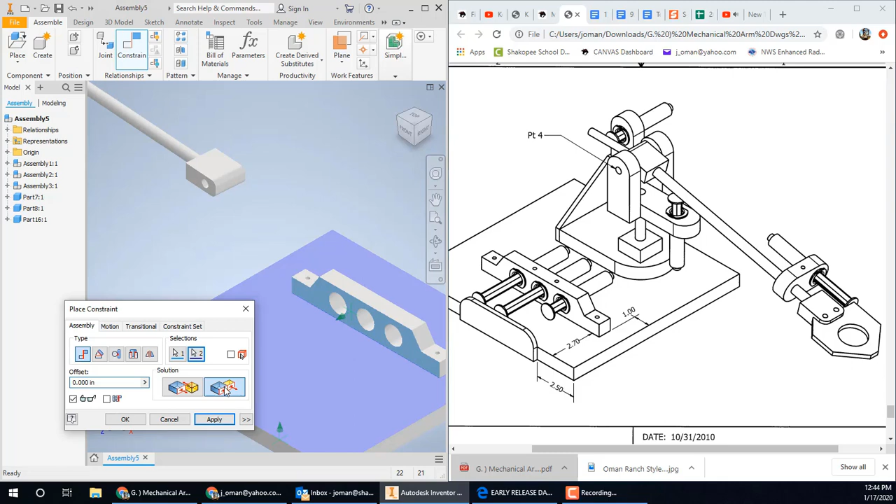Okay, and we'll start constraining things according to the directions. I'm going to start by putting the control pad onto the base. So that's a mate. Apply, then I'm going to flush it to 2 edges and offset it over the 2.7 and the 1-inch offsets from the sides. So this is a flush.

Notice that I picked the wrong thing here, so I'm having to redo something. Like for example, I picked positive 2.7, so I'm going to change it to a negative so it goes the correct direction. And this edge over here should be flush and then offset 1 inch. There we go. So the control pad is correct.

Now the stopper, you're going to mate one of the faces onto the edge of the base and flush 2 edges. And this can be offset, looks like 2.5. Try that again. So again, that's a mate. Apply. Flush the end.

It helps if you zoom in too, you get a better look at what you're trying to work on. Offset 2.5. Apply, and then we still have to do the bottom edge, bottom face. So that piece is done.

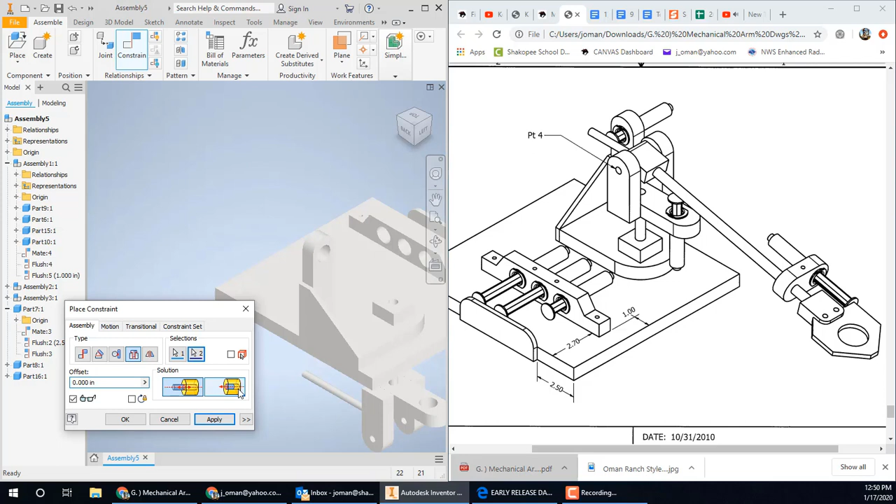Now I have a couple inserts to go. I'll insert all the way to the bottom of the hole. I had the wrong solution, so I flipped it around. Apply. Can still spin on there. That's okay, because that will happen in real life. It's meant to spin.

Okay, it looks like I need one more peg. I gotta go back and get, I believe it's part 4. Maybe it's 3. Looks like part 4. I'll place that, and I'll constrain it. Insert. Grab the end, stick it right there. Flip it if you need to.

And I'll insert, place that, put it there and apply. Okay, and the arm should still rotate. And that is the end of your project right there.